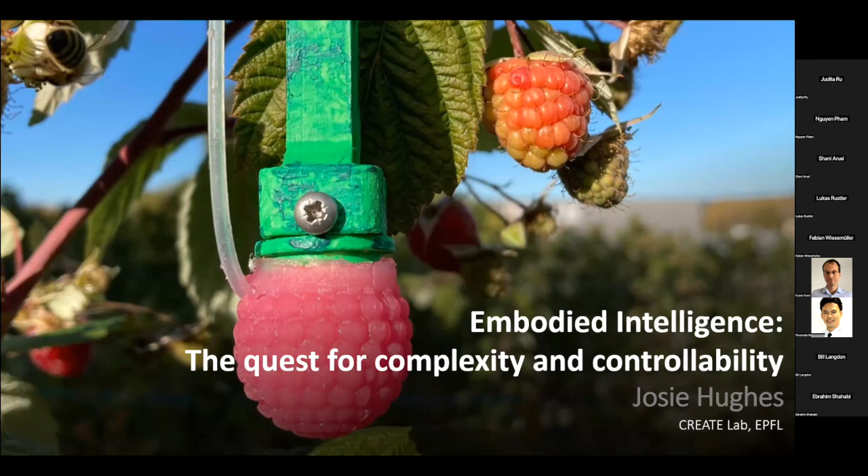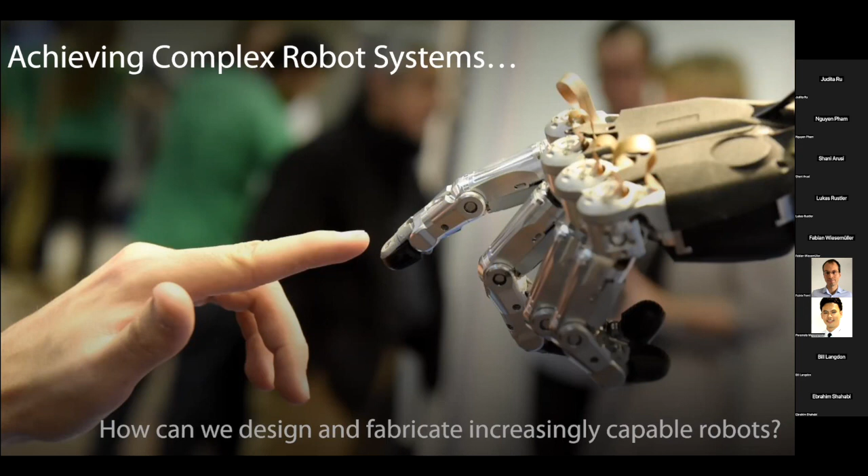And one goal that we're really trying to work on is, how do we achieve complex robotic systems? How do we design and fabricate increasingly capable robots that can begin to show the dexterity, the capabilities that we might see in biological systems? And what I'm really interested in is picking up on some of the topics Cecilia talked on yesterday, about this idea of ecological niche.

How do we extend the capabilities of current robots from being able to operate in a very small niche environment with a small range of functionality to be able to move towards the capabilities of humans or even animals, where they can operate in these wide varieties of environments or ecologies amongst different other humans or different animals, and also show a wide range of functionality, and also perform tasks which are previously unseen, or cope with uncertainties in the task domain.

So we're exploring how, through design and development of robots, we can try and move from the current capabilities of robotic systems closer to humans. So I wanted to start by looking at some of the approaches we're taking, but then looking at what are the fundamental limitations which are perhaps preventing us from reaching this goal.

So one area we're looking at specifically in manipulation is, how can we exploit compliance? So Ord really talked about how variable stiffness, or how stiffness is important, and how compliance is important. So we're looking at what is the role of compliance in manipulation. So to do this, we're looking at making hardware, so in this case, a bio-inspired hand, where we can tune or vary the compliance. So here we have a 20-degree of freedom hand, but we have modularity in the structure.

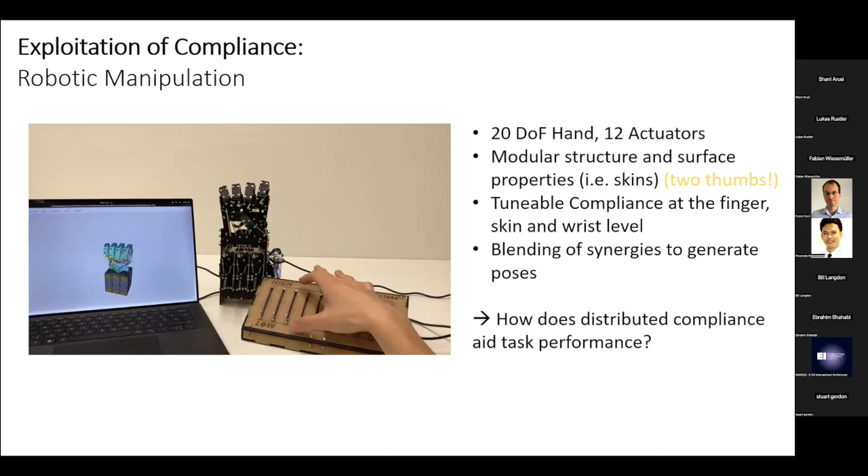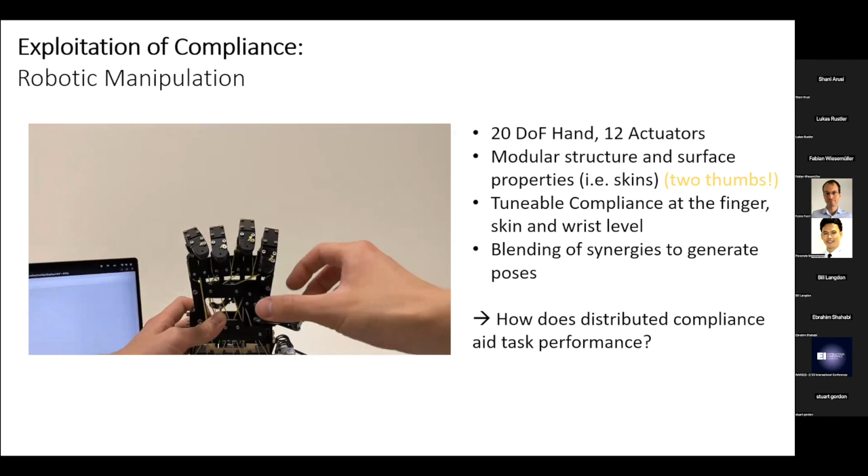So you can see here, we've just got some simple demonstrations of the tunable compliance, the ability to blend poses and synergies. And next we're looking at, how does this distributed compliance aid task performance? So this is very recent work by one of my PhD students, Kai Junge, who presented yesterday.

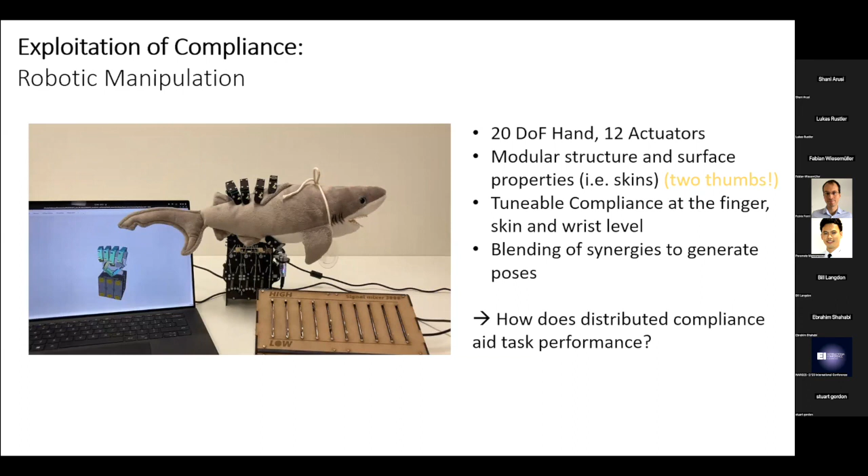A second area we're looking at is exploitation of structure. So we know stiffness is important, but how do we introduce variable or controllable stiffness into larger structures? And to do this, we're looking at architectured materials. And we looked at, how can we create architectured materials where we have a large tunability of the stiffness properties? And we developed these structures, which we call trimmed helicoids, where we take some helicoid structures and trim the inner

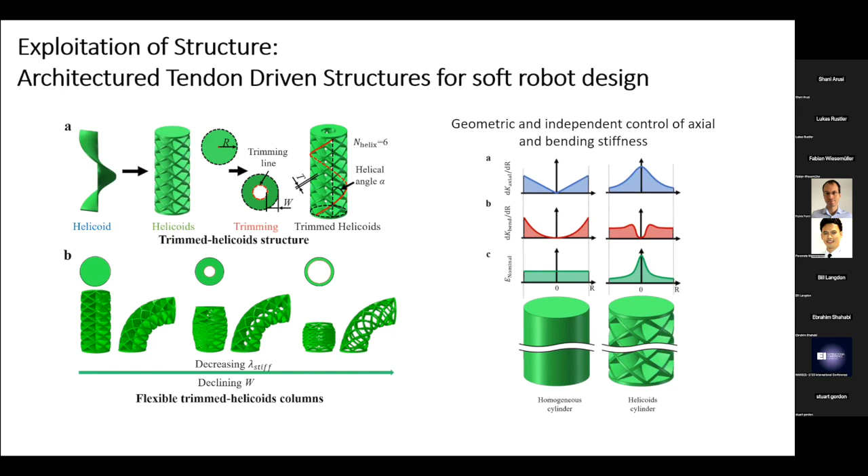material. And these give us some really interesting properties, as we try and illustrate on the right, because through control of the geometry, through the helicoid and the trimming, we can have independent control of the axial and bending stiffness. And this is really important to be able to tune and optimize not only the workspace of the robot and the compliance, but also sensitivity to noise in tendon length or tendon control. So this gives us a really interesting design space of structures and materials to be able to then add actuation

and form robots. So to this end, we then add tendon-driven actuation to these architectured structures to form kind of elephant-inspired manipulators, as you can see here. And these structures can be used to create these continuum-style manipulators, which give us a great degree of maneuverability and exploration. And we can also tune, so on the bottom here, on the x-axis of these plots, we have the ratio between the bending and axial stiffness.

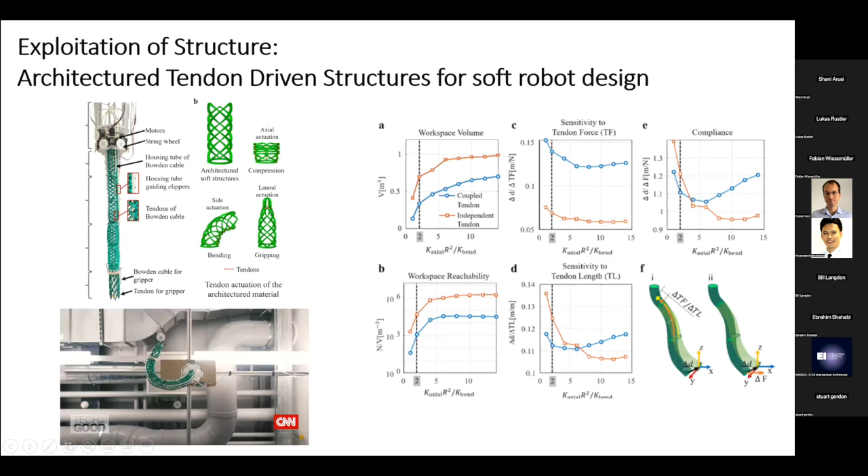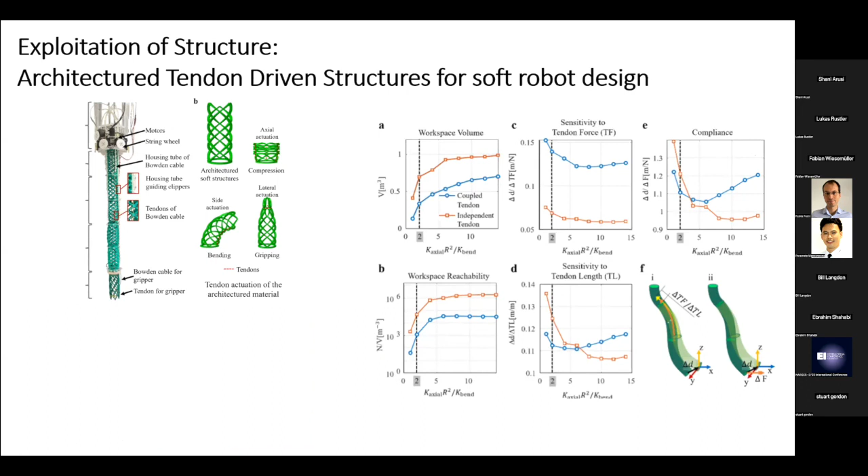And as you can see, we look at how these properties vary for this robot, the workspace, sensitivity or error, compliance, and workspace reachability. So this allows us to then explore these various trade-offs by tuning the geometrical parameters to find the optimal parameters for a given application.

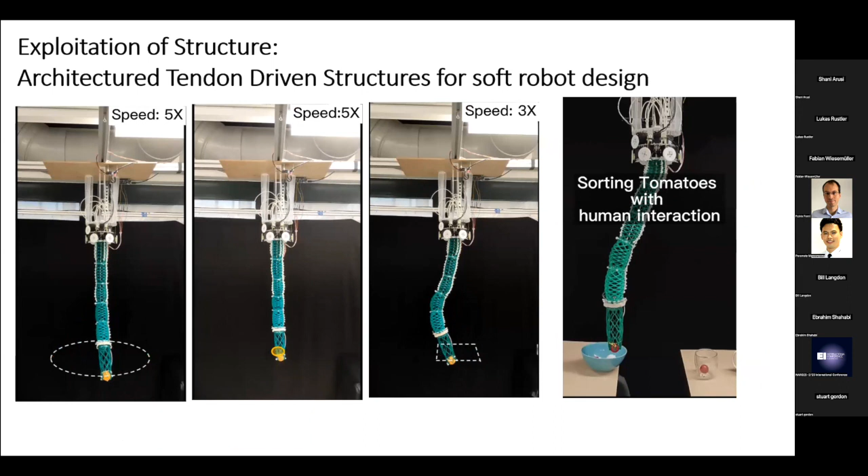So for example, we can select geometry that provides the highest precision or rejection of errors in the controller. And we can also look at the compliance. So how can we tune or select a compliance that helps with task performance and even allows compliant interactions with humans?

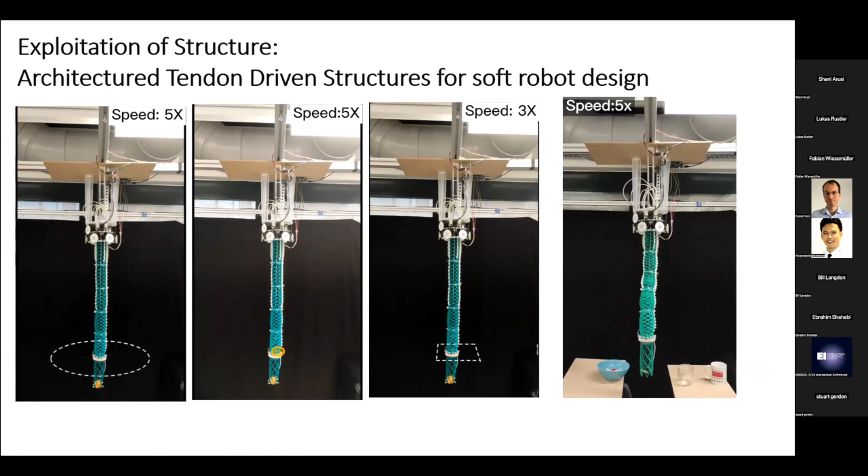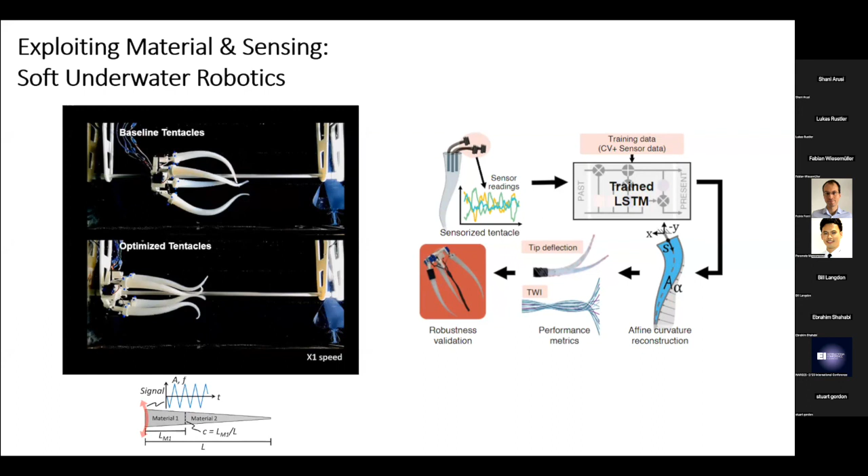And we can also inject or create sensors within these soft tentacles where we can do pose reconstruction. And using this, we're looking at using proprioceptive metrics to be able to online optimize the trajectory to optimize for cost of transport or swimming speed.

And these offer us some very interesting properties, even though it's a very simple system: we get improved energy efficiency, pose reconstruction, simplified control, and also we have this kind of embodied safety limits provided by the tether. And this allows us to explore very large scales and very extreme terrains.

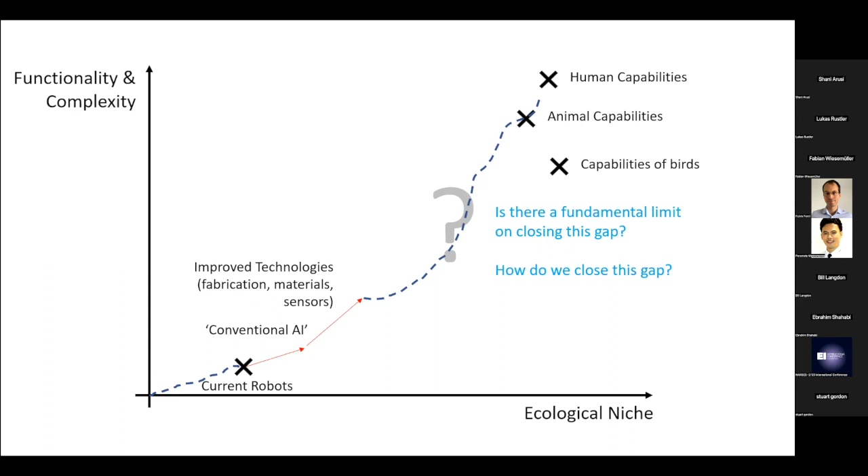I think we can take, for want of a better word, conventional AI approaches, and this can close the gap somewhat. We can also improve technologies in terms of fabrication, materials, sensors, and this probably can also improve the capabilities somewhat. But still, I think we have this gap that remains. I don't think this is perhaps the entire answer. So is there something fundamental in how we approach the design of these robots that is limiting us? Is there something missing in our current approach?

And I think one issue is this idea of replicating the final state of a robot. Can we instead learn from biological systems that we need a more developmental and growth-based approach to design of robots? And to this extent, do we perhaps need to explore learning and processing or even design on different temporal scales, rather than this all happening at a fixed clock rate? Do we need to introduce more low-level physically regulated or stabilized processes, such that we have some amount of this more decentralized and offloaded? And can we also move to more developmental or growth-based design?

And finally, I think to move to an area where we have a wider environment and wider functionality space, we also need to think of what's a meaningful evaluation or fitness function. What are we trying to optimize for beyond a single task? And can we look to biology to understand again, what are meaningful fitness functions or objectives to try and achieve?

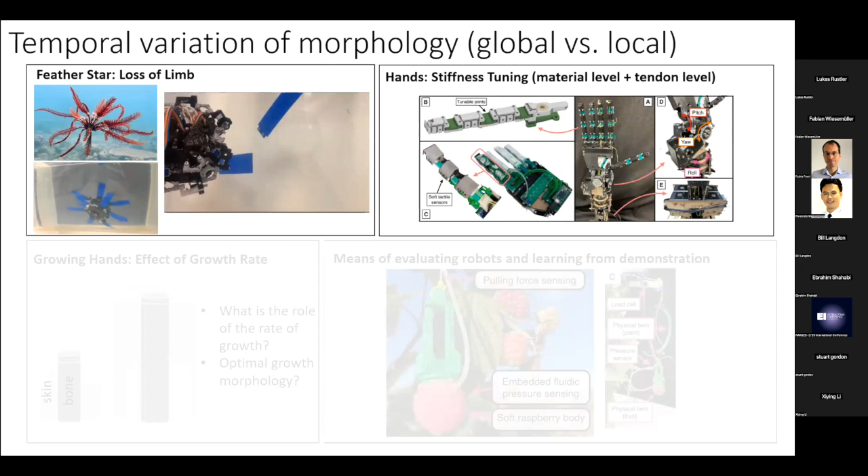So within this area, we're looking at a few approaches to addressing some of these questions. So first of all, looking at online change of morphology to see how that can aid control. As I've already discussed, looking at online tunability of compliance, looking at the effect of growth and how growth affects our ability to learn, and how can we couple growth and learning together.

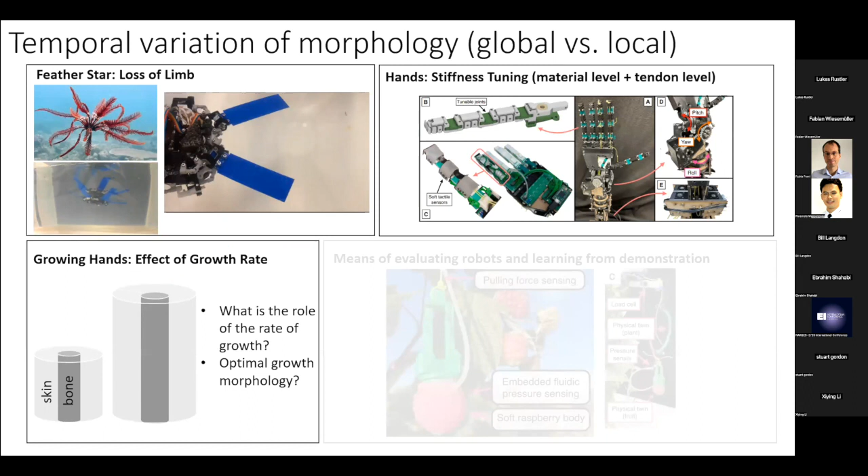And also creating meaningful tools for evaluating robots. So here we're creating what we call a soft sensorized physical twin to evaluate how a robot and a human can perform complex tasks, such as harvesting of a raspberry.